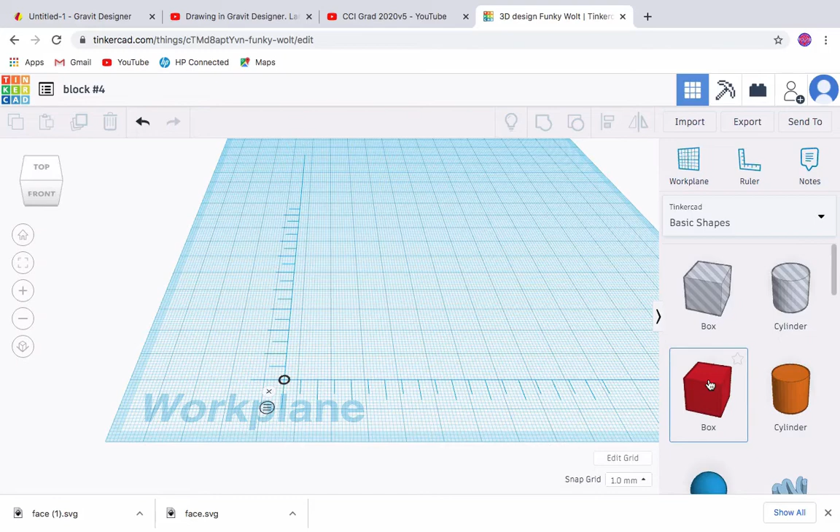Okay, in this last one we're going to draw the fourth object, which Mr. Lagarde sometimes calls the tugboat. When you look at it, it looks like it's going to be super hard to draw, but in fact it's super easy. I have to admit, though, it's taken me 3 or 4 different attempts. The first time I drew it in a very complicated manner and it took me a long time. But I think I've got a simple plan here.

So we start with a block, drag our block on. And again, we're going to make the block 50. We're going to leave it at 20, and we're going to make it 30.

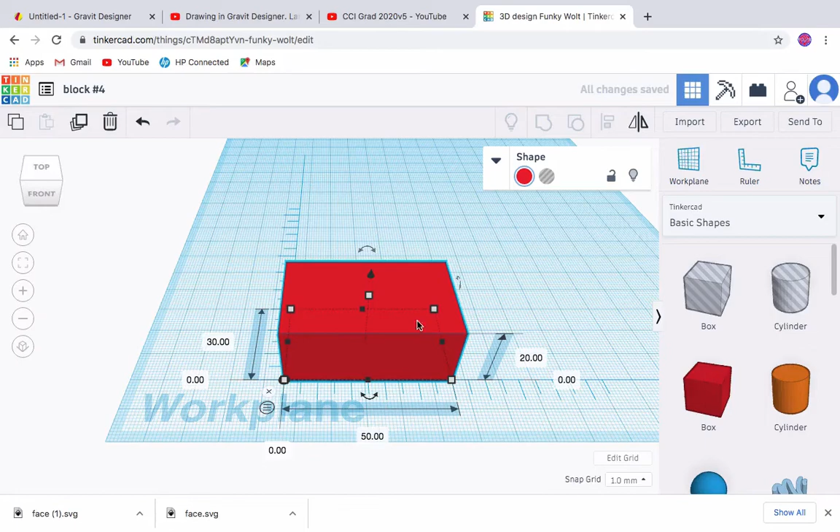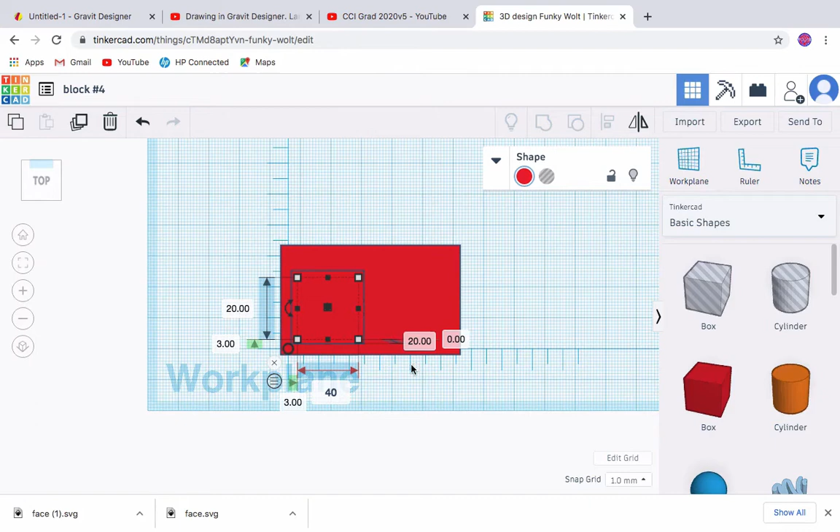Okay, we're going to switch to the top view. We're going to bring in another block and drop it down on top. This time we want that little cutout to be 5 deep, so we're going to make it 40, and leave this at 20. Then the thickness, we're going to just change it to 5.

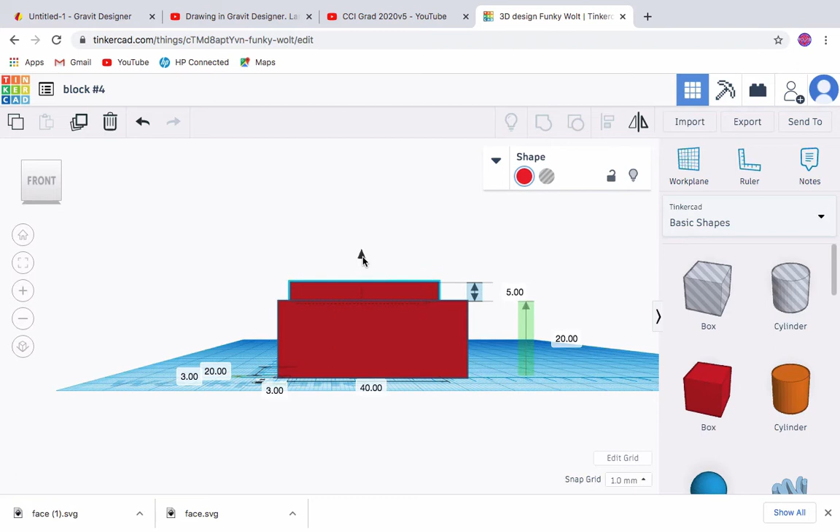Now we need to change to the front view again, and use this handle right here to pull it up so it's right on top. Now it's hard to tell if it's actually on top or not, so what you need to do is switch out of isometric view and change it to ortho view. Then I can see exactly when it's in the right spot.

Change back to the top view and line it up so it is centered on our block. So there it is, centered.

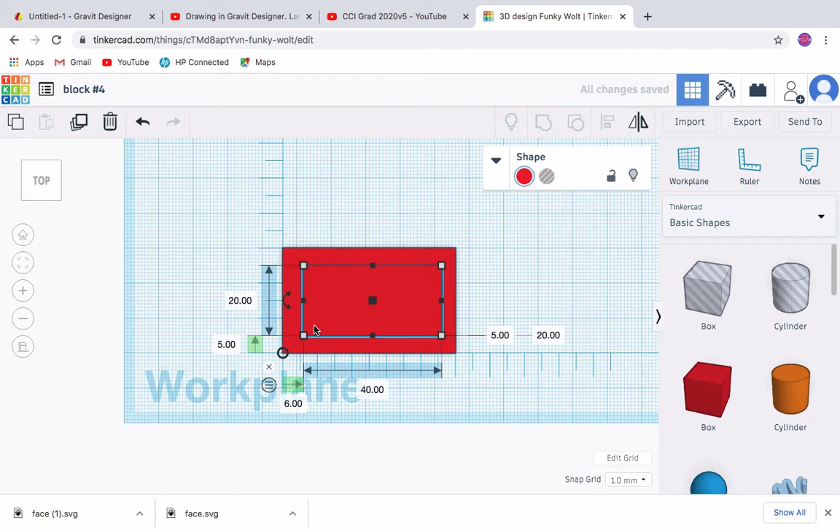We're going to add another box, and this time it's quite easy because we can just drag and drop it so it matches the one on the bottom. Again, we're going to change its thickness to 5. Change to the front view, and again we're going to drag it up top.

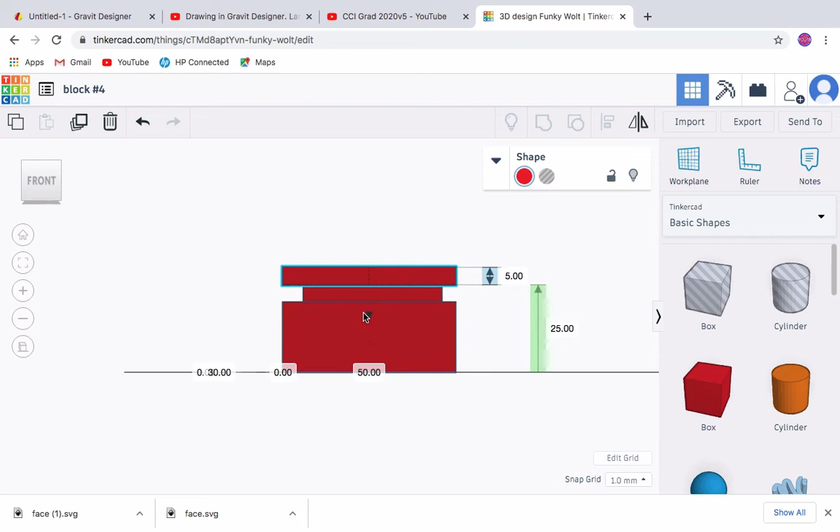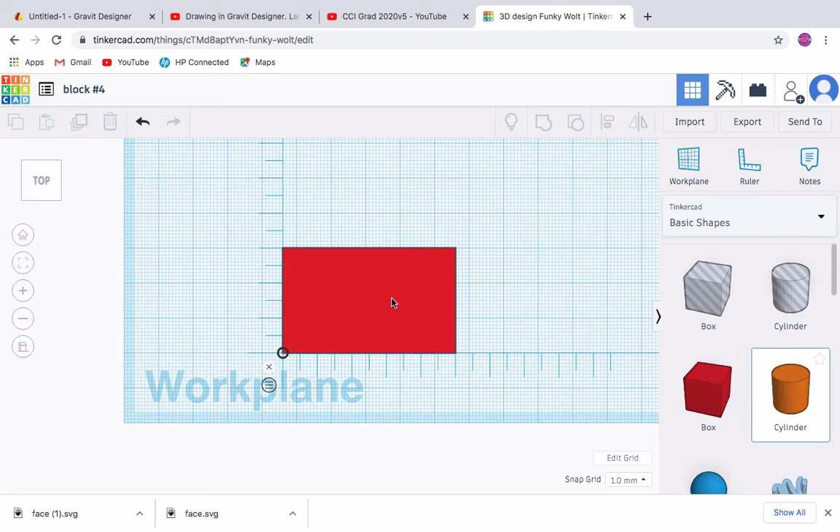And let's change to the perspective view, and we're in good shape. Okay, so now let's go back to the top view, back to the ortho view, so there's no perspective, and grab a cylinder. We're going to drag it in, and with the cylinder we want to change it to 7, 7, and 50 tall.

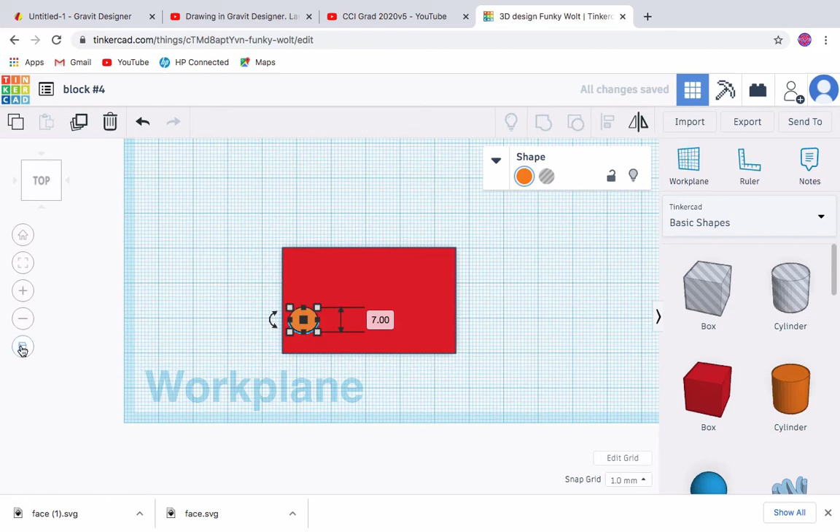Okay, so now we want to move it into the middle. Let's go to the side view to have a look, front view. To be honest, we're pretty happy with that. So let's go back to the top, and we're going to copy that.

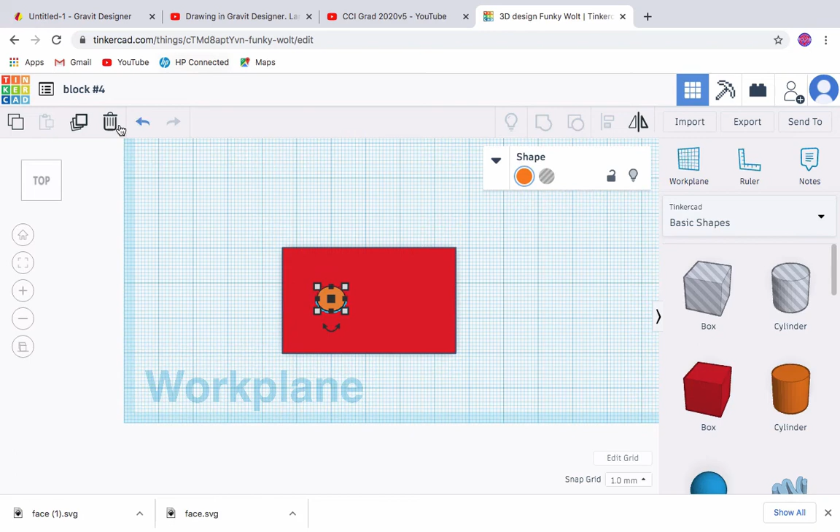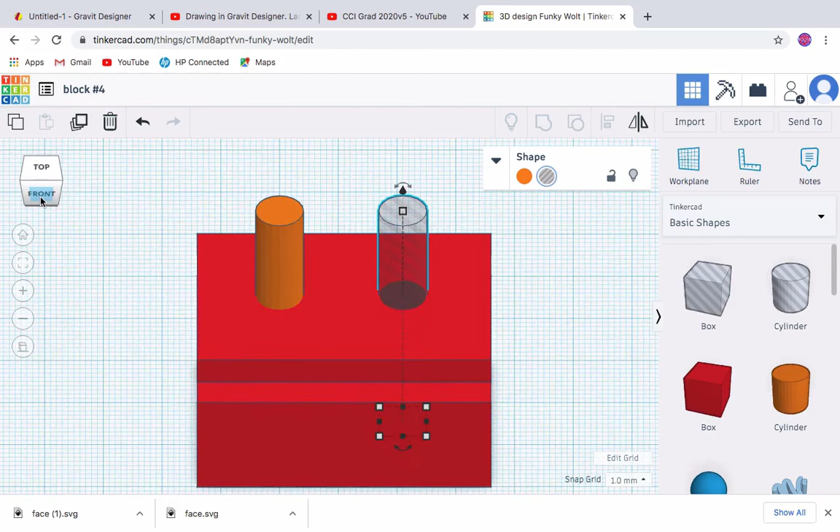Okay, once we have the object dragged to where we want, we change the object into a hole. Then let's go to the front view again, take that hole object and pull it down. So that's going to become our hole.

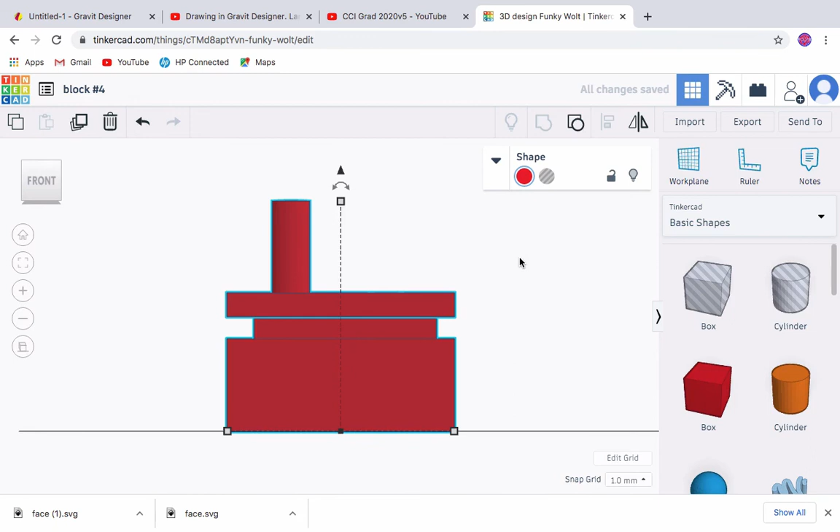Next step, we want to select everything. Once we have everything selected, we want to group the objects together. Then let's zoom back out, change to perspective, and there's our object. Now again, I want you to duplicate the 3 objects, make one the front, one the right side, and one the top.